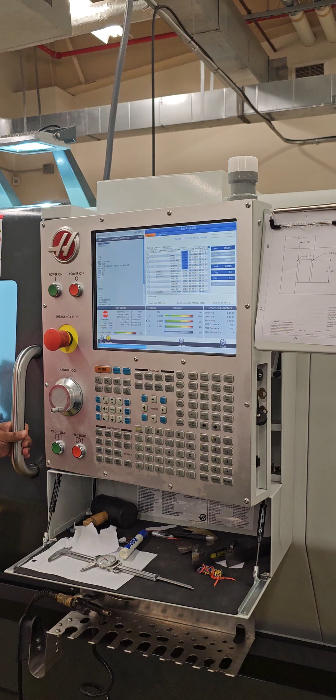For your lathe test, when you're gonna take a retest, it's gonna be damn near the same thing. You're gonna have a print, you gotta make your program, you gotta touch off your tools, right? So I don't care whichever way you do it. If you're studying the program and you say, man, I wanna knock out the program first, knock out the program. But don't get too caught up that you forget to touch off your tools, because what happens if you don't touch off your tools? You fail.

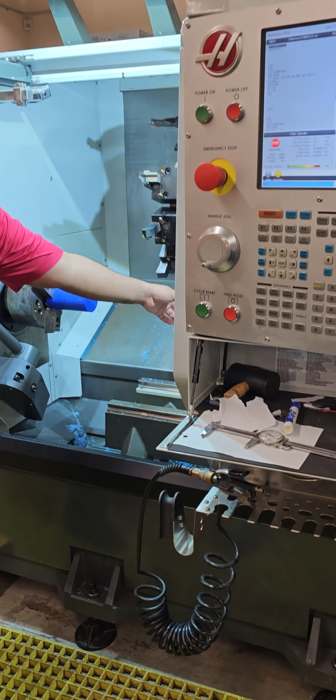Let's say I did a part before this and my part stuck out this long. Next thing you know, you do your program, but you fail to touch off your tools, and the next part that I'm doing is even longer. What's gonna happen? You're gonna break a tool. You're gonna crash, right? So your program could be flawless, perfect, but you still fail, all right?

So obviously, if I touch off, I'm just gonna come over on my Z face, come over to the part.

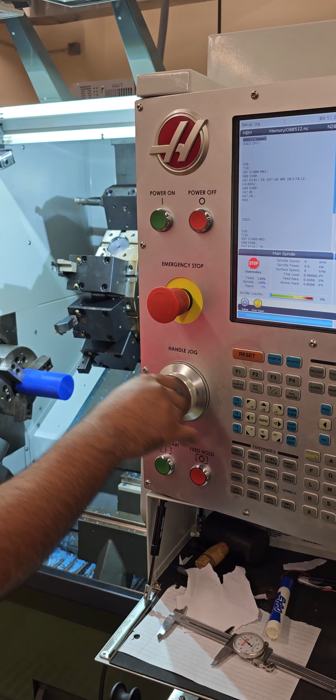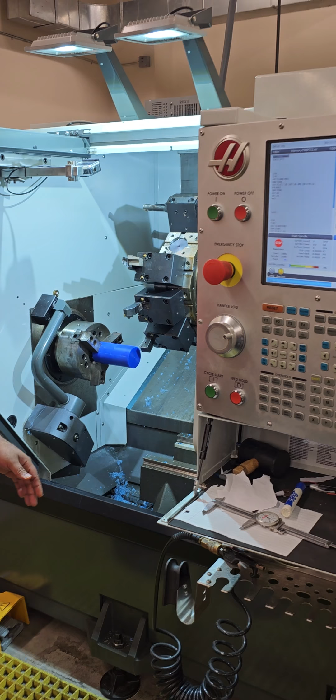Now, the first thing you probably want to do is make sure your work is on 0. G54Z. Remember, guys, how I explained to you that if I have a part here and I zero everything there, then I get a longer part. All I have to do is call my lead tool and change my Z under my G54, and everything else follows, correct?

So I want that at 0 to begin with, right? Okay, so if the last person had a number in there, make sure you go in there and you put it at 0. Does that make sense? Yes. So you want 0.

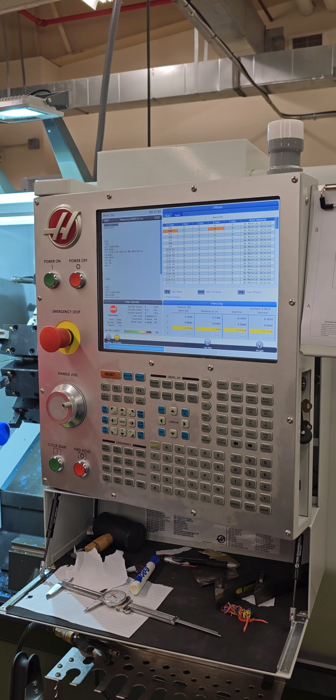Now you're gonna come over here and your tool number 1. You're gonna come over on your Z, get your piece of paper, what have you, come up to the front. If that's my 0, that's my 0, right? Same thing with the X. Come out, go up, come back over, bring it down. Once it gets tight enough that you can't move the paper anymore.

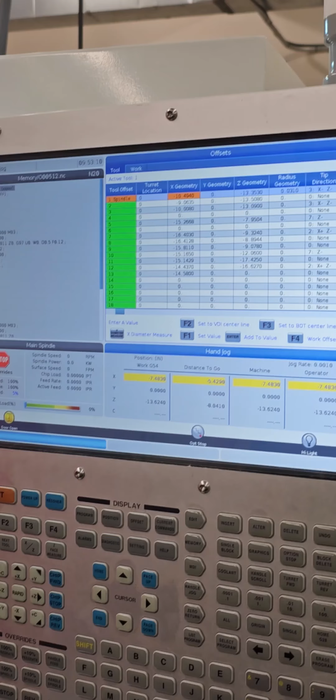All right, now like I said before, this computer is a smart computer. If I push X diameter measure, it's gonna jump to it right away. But when you get a job at a real shop, you don't know what type of machine you're running, you don't know how old the machine is, you don't know what brand it's gonna be. So get used to coming over to the X, because on the older ones, you push X diameter measure, if you're not highlighted on it, nothing happens.

So you wanna be on X, push X diameter measure, then we're gonna enter the diameter of the part, correct? So if it's 3 inches, we're just gonna enter there 3 inches. If it's 3 inches and 5 thousandths, measured with the calipers, we enter 3 inches and 5 thousandths. Hit enter. Boom. Change that number, right?

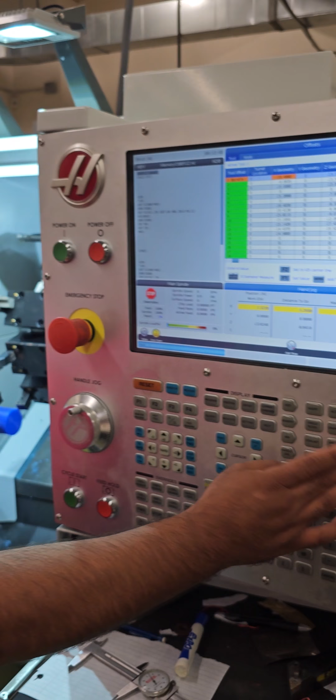Now after that, just raise up your Z, go a little bit faster, close the door, be at 5% if you're taking your test, and just push the home button. That's gonna send it home. I'll probably tell you, bump it up to 25 because I know it's going home, right? So you just bump it up to 25. Bam. If you want to, while you're still here, go back up because you know you're gonna run it 2 inches above in front anyways, right?

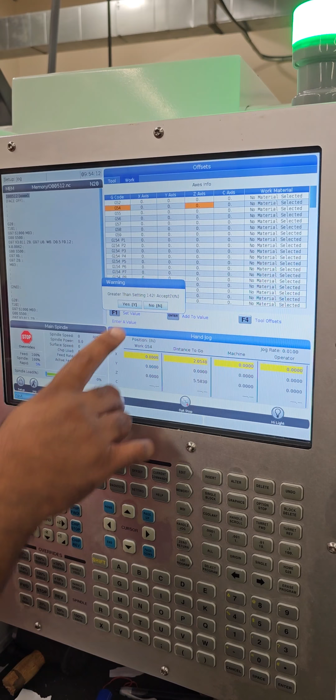Come over here and go ahead and put your 2.0, enter. Is that what you really want to do? Do you accept it? Yes. There goes my 2 inches, right? Now the Z that I set in front here, it's now 2 inches in front of the part, right?

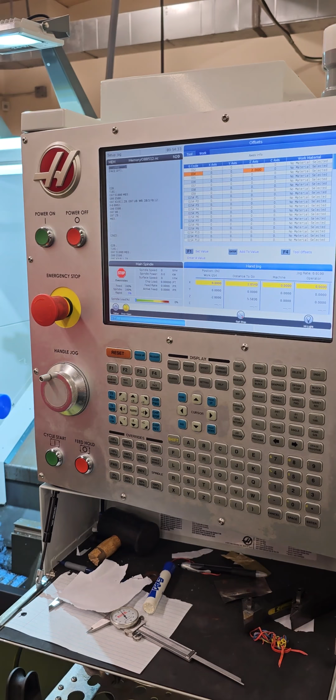So why do we do that? Because you guys are still training and we can't just pull out the programming graphics and start going to town on the part, right? We got to make sure that we're not going to crash or that the part's going to match the print, right? The program's going to match the print. So we have that on there, right?

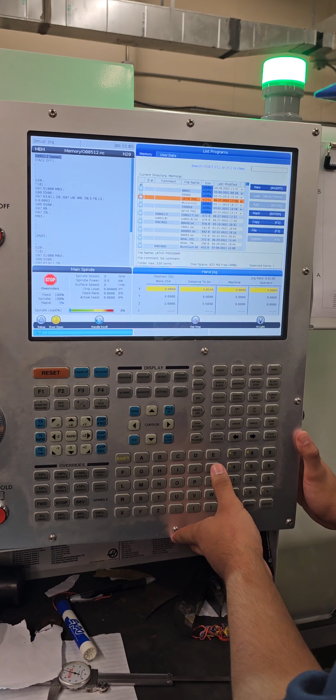So let's say we wanted to make 515, right? It's not in there. Just like I told you guys before, read your screen. If I wanted to make a new program, what does my screen say? New, click insert. So hit the insert key. I want to make 515, so 515.

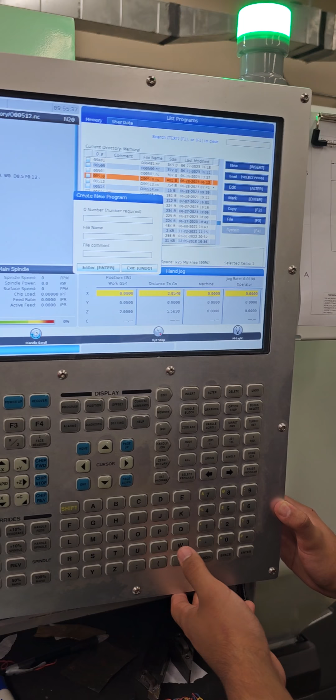Enter. What happens? It pops up, correct? It creates that program. Now we're not selected yet, correct? No. So now we're gonna use the down arrows to get on it.

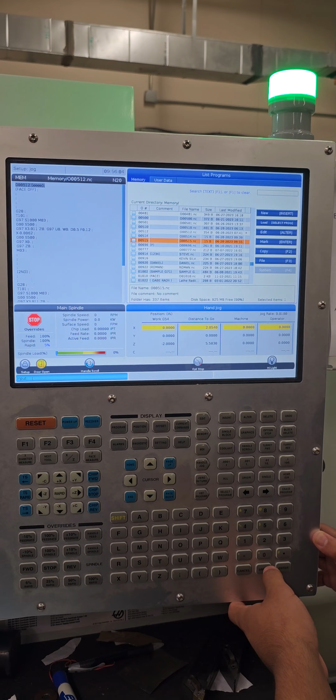This is the way I talk because I have to ask you guys questions. What are you trying to do? Oh, I'm trying to select that program. What are you trying to do? I'm trying to select the program. What are we trying to do? Oh, select program, correct? That's it. So push select program. There we go.

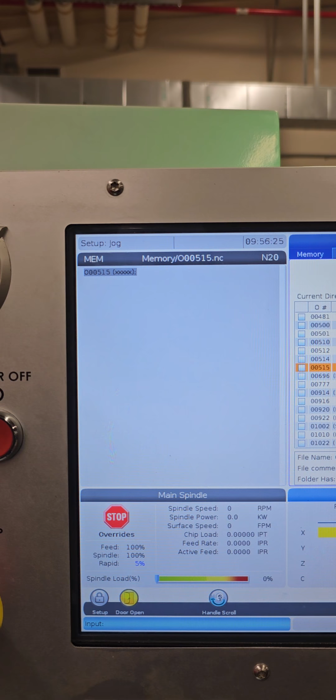Now it's on there. Now after that, we gotta edit the program to make the program, right? So what key are we gonna press? Edit. That's like the only thing I knew.

So now from here, we go ahead and step away. From here, we're gonna start writing our program, correct? A lot of you guys made mistakes. Some of you guys made simple mistakes, some of you guys made huge mistakes, right?

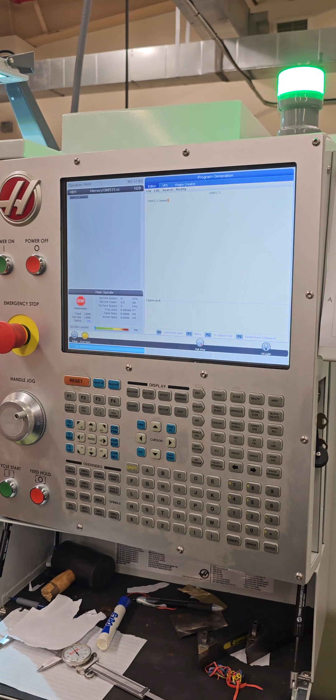So this program, what you wrote down in your notebooks, that's what you could study at home. I know you can't study this at home because who has one of these in their house? None of you guys, right? So of course you can't study that at home. But writing down the code and understanding the code, you guys could do that at home, correct? Yeah, the book has it, but good luck deciphering what the book's talking about when you read it. But the way I explained it to you guys and the way you guys wrote down your own notes, y'all should be able to understand it after that.

We went over canned cycle facing how long ago? A few days ago. First time we went over it, what, 3 or 4 weeks ago? Canned cycle, yeah the facing. Oh yeah, about 3 weeks ago. Yeah, 2 or 3 weeks ago. And we still made mistakes on it, guys.

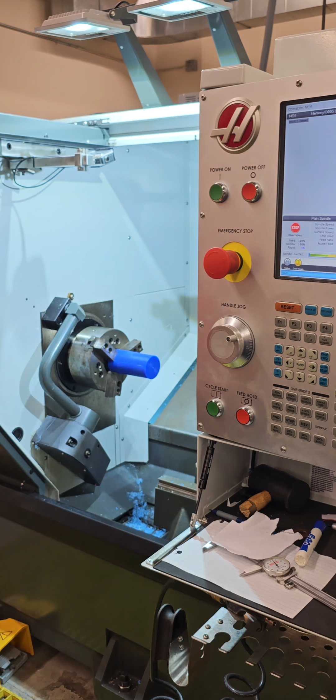Whatever I teach you guys, it's not like, okay that's what we learned, let's move on to the next thing. I didn't learn it 100%, but it's okay, I'm still gonna move forward. No, we have to understand it, because that's our bread and butter whenever we start working at a shop, right?

So the first thing I'm gonna do, I'm gonna put a little bit of blocks because I like my space in there, right? So this one doesn't have an EOB, but it has that, what the hell you call it, semicolon. Yeah, that one. That's why I don't teach English.

All right, so what's the first code I'm gonna put on top? G28, right? I want to send everything home. Be safe, correct? After that, very important, I need a what? Tool number, right? If I forget the tool number, what code is it gonna give me?

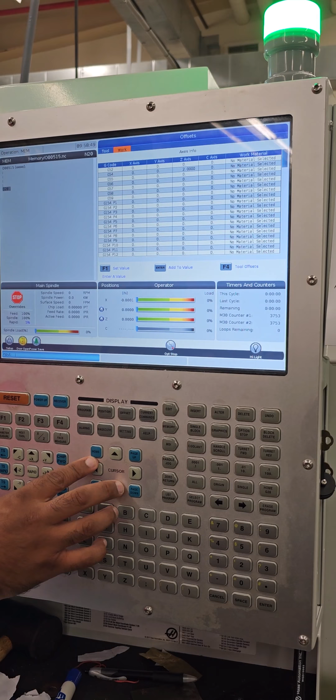X over travel or Z over travel, right? And you're gonna look at your numbers after that, correct? Why is my X going over travel? Why is my Z going over travel? It's because you didn't give it a tool to identify the geometry numbers on them. Does that make sense? Because you didn't give it these numbers at all.

So it's thinking the machine coordinates and it's thinking, hey, that's way too damn far. Because you didn't give me a tool number, that's why it says X over travel or Z over travel. Does that make sense? All right, we're going back to edit now.

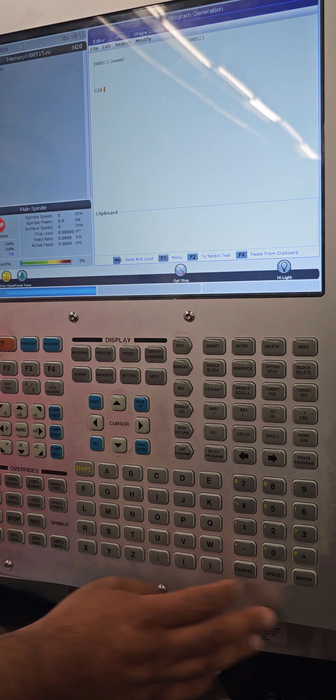So now I need my tool number, T101, and the block enter, right? Right under my tool number, I need to give it a what? A maximum for my RPMs, correct? So G50, S, let's just say 1000, right? And the block, correct? After that, I'm gonna turn on my spindle with the G97 first, correct?

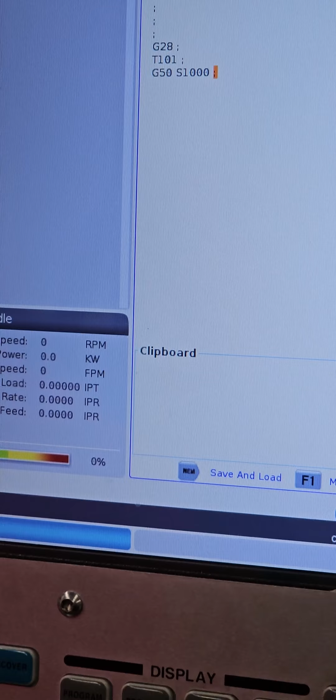So a G97, S, 500 is fine or 400 is fine, but we want to include our spindle direction in this one, so our spindle turns on, correct? M03, and the block, enter. Oh I put a G91, it's supposed to be a G97.

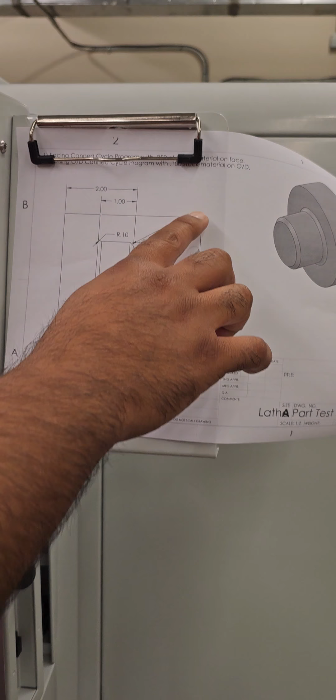All right, we're tracking so far? All right, so what's next after that? Starting position? Starting position, right? So I need to put a G00, G54, X, if I'm looking at my print, 3.1, Z, depending on how much stock I have in front, that's what I'm gonna put for that, right? But we're just gonna pretend it's just 100 thousandths right now, correct?

So, G00, G54, X 3.1, Z 0.1, and the block enter, correct?

So after that, we need to give it a G96, right? Because it's gonna go faster and go slower as it goes to the center of the spindle, correct? So we're gonna put a G96, S 400 is fine, also 450.

All right, we got that so far? How many of you guys messed up on your program before those numbers?

I messed up. I was showing up. For me, it's not that, oh, you're a teacher so you're supposed to know this. No, you know how many teachers still don't know this, even though they teach it? I don't have any notes right now guys, I'm doing this off the top of my head.

So this is how you get to be a lead man and a supervisor at a shop. This is how you do that. But like I said guys, it's just studying and studying, understanding what you need before it goes on there. We need to send it home. We need to give it a tool number. We need to give it a maximum RPM. We want to turn on the spindle if the part falls out.

We need to give it a starting position, and then we give it a G96. That's my intro guys, right? I've been preaching that since the beginning. That's your intro. Make sure you got the right tool too. So what's next? Your body.

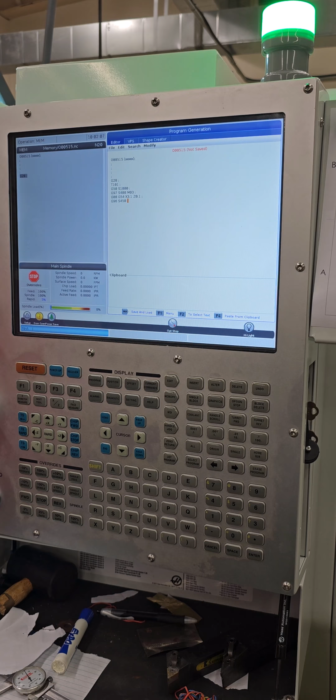G what? Which one puts it on the x-axis? 0-1. What? G72. Yes, G72, it's your canned cycle. G72, all right. So I need a G72.

And then I'm gonna need a P after that, because that P is gonna start with the first number line. P10 is fine. So P10, then I need a Q, Q20. Then I need a U. U is a stock material for my finish pass, but we're just gonna leave it as a 0 right now. So U 0.0, W 0.0.

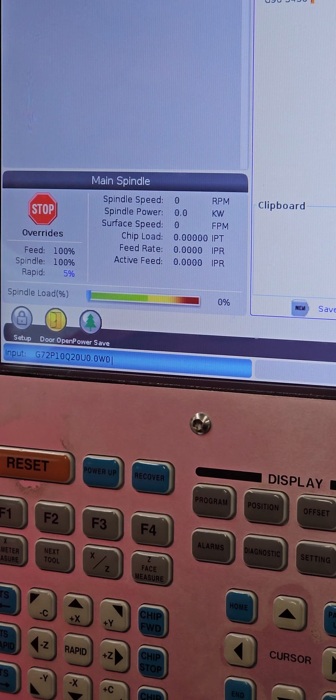As I'm putting this on, I also gotta tell it what depth of cut I'm gonna take. So I need a D value. I could just put D.1 or D.05 if I'm gonna take off 50, then another 50. And I can't stop there, I still need to include the last thing, feed rate. I need to tell it how fast to go. F.012 and end the block. Boom.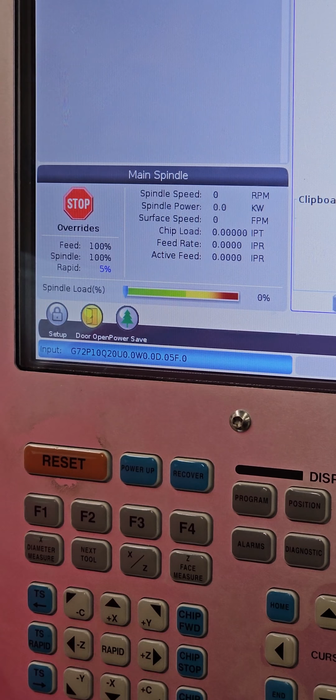How many of you guys messed up on that line? Well, one good job out of you guys, right?

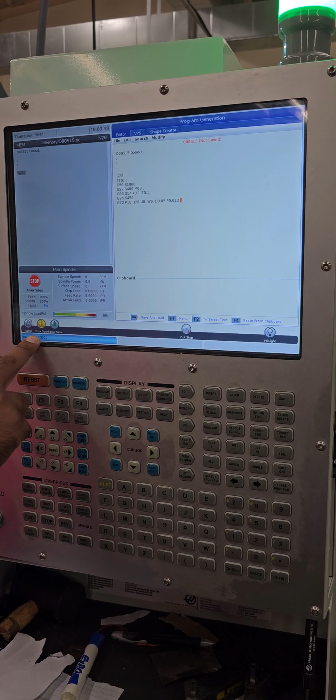So right under my G72, obviously I have P10. So the first thing I need is an N10. So we're just identifying what we're gonna cut and where we have to be at. Just the geometry. So I'm gonna put a G00, so it rapids up on my Z to that location. G00, and I'm just gonna put Z0, because I'm facing and I want to end up on Z0 when I'm done. I'm starting at Z.1 and I'm gonna end up at Z0. Does that make sense? Yeah.

So I identified over here on my Z, but now I have to put the cut going down, correct? So now we need an X. So that's gonna be a G01 now, right? Linear cut. We gotta change it to a G01, X negative 0.062, correct? X negatives are going down, so we gotta subtract material to pass the face of the center line, so you can cut off that nipple. And that's double the tool nose radius, the tool compensation.

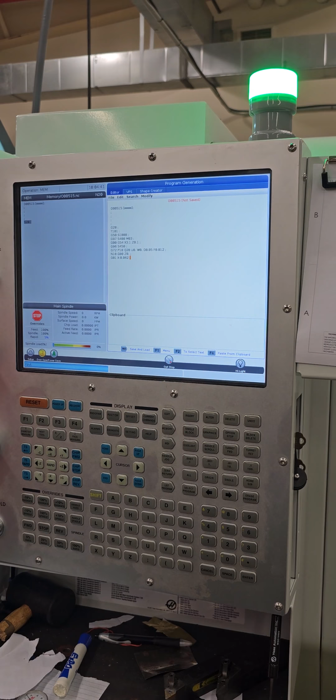So what's next after this? You have to rapid off. I have to come off the face, correct? So I'm gonna change it to a G00, Z.1 end the block. Oh wait, I need my N. So N20. There we go.

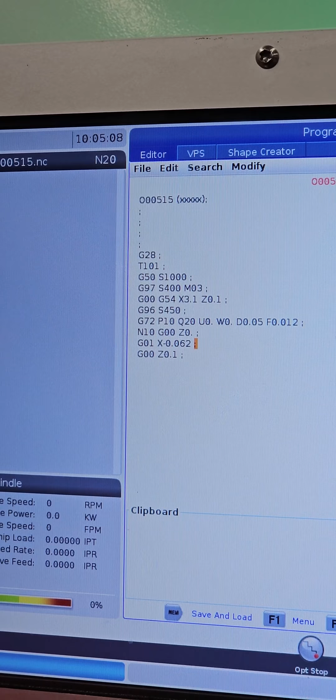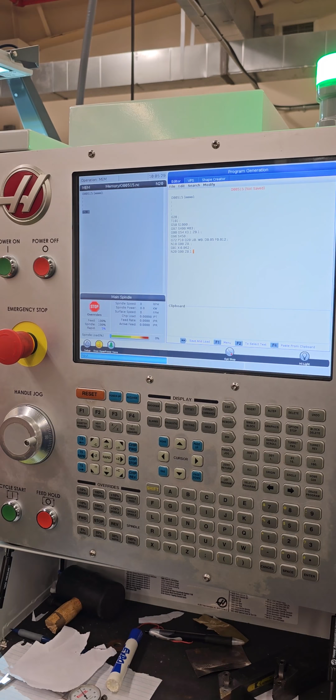So after this, it's my choice however I want to come off of it. I could G00, G53, X0, G00, G53, Z0, or I could just G28 it. G28, because 9 times out of 10, if I'm facing, I don't have a tailstock on there, because how the hell are you going to face with the tailstock on there? You won't be able to. So G28, end the block, enter.

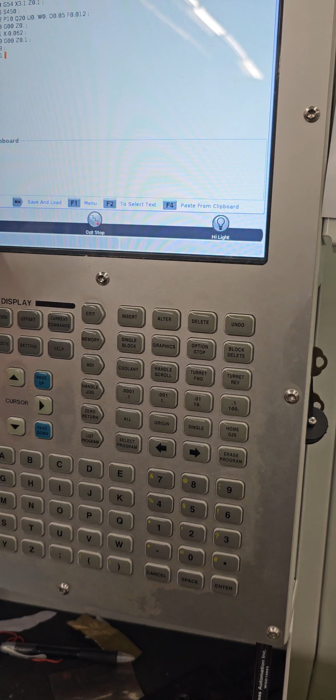Now I'm going to put an M01 at the end of that program. Now, like I said earlier guys, now that we know a little bit more about this machine, if I have optional stop on, it'll stop at that M01. If I don't want it to stop there, I just take it off and the program will continue running all the way through. Does that make sense? That's what M01 does with the optional stop. If I put an M00 there, as soon as it reaches the M00, it's gonna stop, and it's not gonna go again until I push the green button. Does that make sense?

If there's an M30 there, I'm just looping that same program over and over again, never getting to what's under there. Does that make sense? Right now there's nothing here, but if there's more program under that, it'll stop and go with the optional stop. We'll do that.

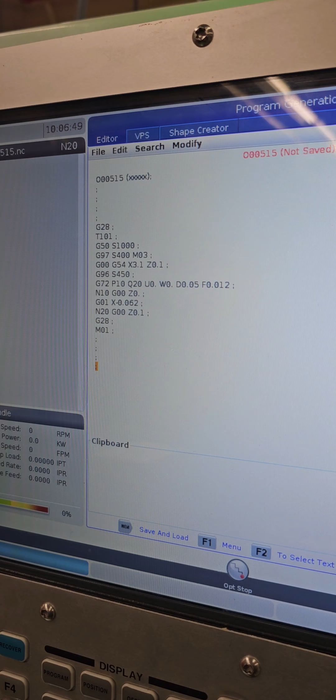So that's my facing, right? Now I have to do my turning OD, correct? Of course, you want to start it with the G28 again, just to make sure it's safe. We still want our tool number, T101, end the block, enter.

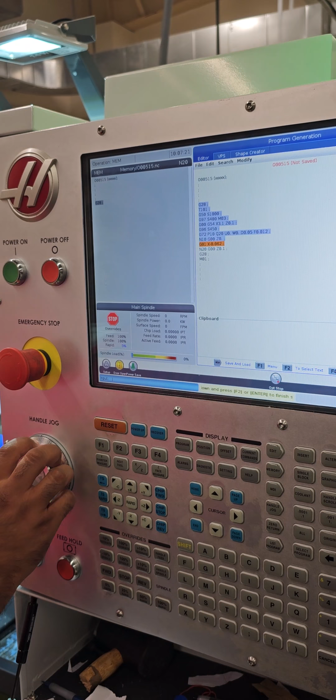So really, I could have copied and pasted pretty much this whole thing up here. Let me go ahead and do that so it's easier, but you understand what you're gonna move. If I hit F2, come down, highlight it, hit enter, where I want to copy to, right there. Hit undo, well that just takes it off, right?

So whenever you copy and paste, make sure you go through that new program and understand what you're doing for your next operation, so you know what to erase. Does that make sense? Because if you don't take some of this stuff off, especially on the mill, you're gonna have problems because your H's and your D's aren't gonna match your tool numbers.

Does that make sense? So we know we have a G28, we gotta send it home. We're still gonna use tool number 1, so we'll leave that alone. Our maximum RPM, that's fine, that's fine, that's fine, because we're still identifying the stock, so that's fine. We still got a G96 on there.

Now a G72 - if I leave that G72 on there, it's gonna throw me an alarm. Does that make sense? So now I have to switch that to a what? G71.

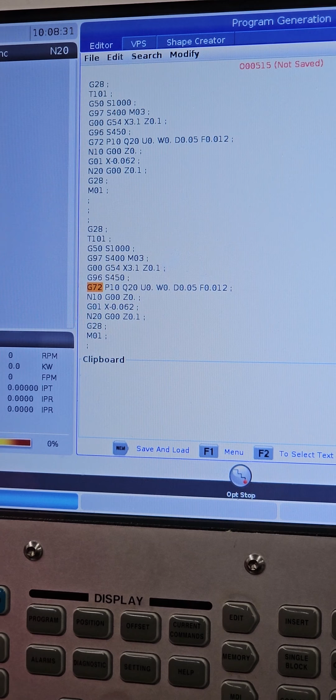So if I leave that P as it is, what's gonna happen? Get an alarm, right? Because it's matching my face piece. So it's gonna give me an alarm, right? So I gotta change that. Put it P100 if you want, Q200.

But make sure you come over here and change the N's also. And 100. Is that good?

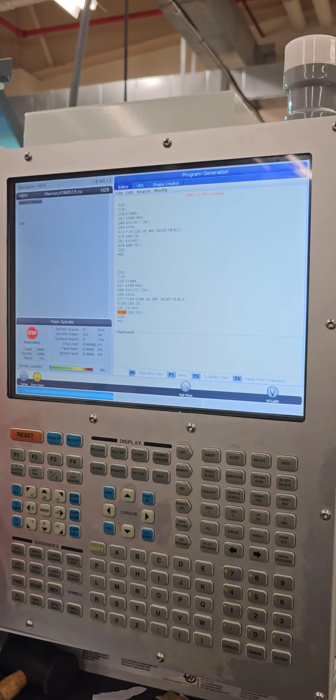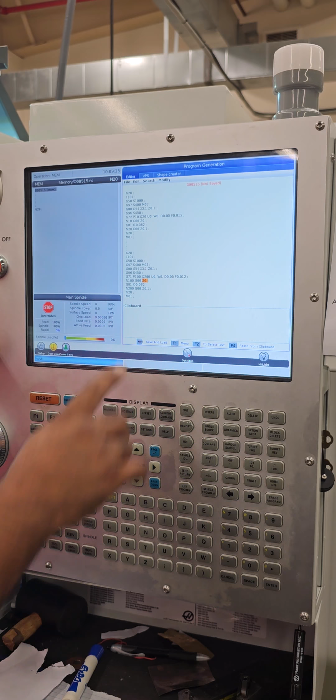So now we have our program coming in here. We could rapid at G00, but we're gonna have an X here, because we're still 100 thousandths in front of the part. So our X values - what did we say earlier in class? That we're gonna take our 1.5, 100 thousandths from the top, 100 from the bottom, and then go 100 thousandths lower from it, to start our actual chamfer move. So that X is gonna be 1.5 minus 2, that equals 1.3 minus another 1, 1.2, correct?

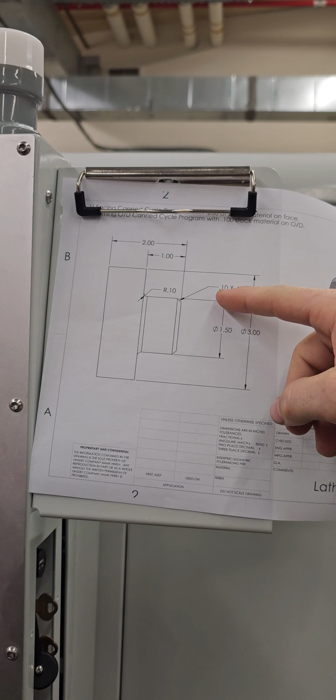Wait, I thought you were doing 1.5 minus 0.1.1. And then we're taking it down another 100, because if I start my chamfer right there, it's gonna fold over, remember? So we're just gonna start 100 thousandths under that, under the chamfer. Gotcha, that's all we're doing. So that's 1.2.

Are we tracking so far? Yep. Alright, I could go ahead and delete this because I know I'm not going to use it. I'm not facing anymore, right?

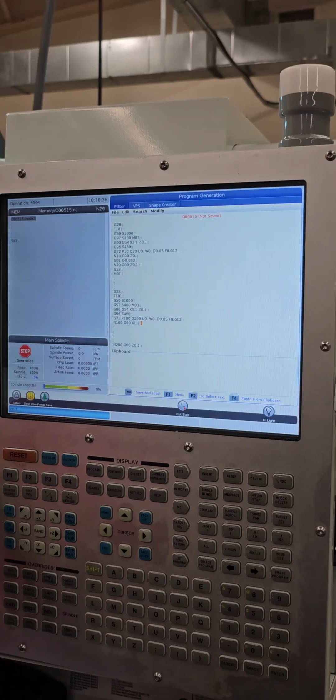So now that I'm on that point, what do I have to do if I'm going to activate cutter comp? Gotta put in my G02, right? So we're going to put in a G42. You said 0, you meant 42. G42, that was my accent. Put a G42 on there, right?

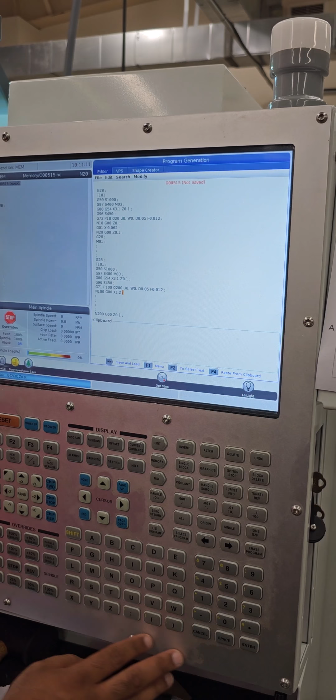Put a G01 because I'm coming to the face of the part, straight line, and Z0, correct? So G01, Z0.0 in the block. Does that make sense?

Now the program, the one in the book probably has your G42 up here. It's gonna do the same thing, as long as you activate it before you're on the part. Does that make sense? Remember the rule when we were reading cutter comp - it needs to be activated off the part going onto the part.

Okay, so you're basically starting here, about to go in on Z0 right now, so I can start doing that radius. But then you're at X 1.2. Yeah, so that's 1.5, 100 from the top, 100 from the bottom, that's 1.3 minus another 100.

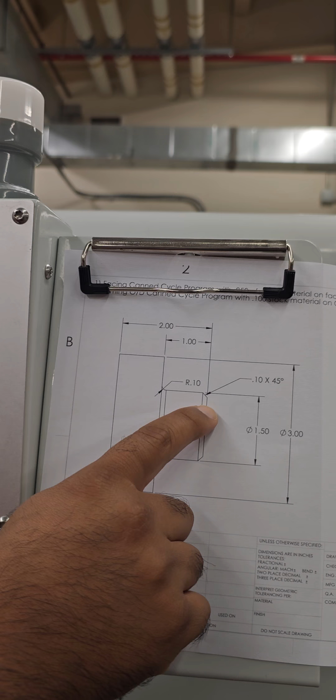So I'm right there right now. So you're basically right here. Yeah, you're going in, then up, then over. Got it.

Alright, so now my next movement is gonna be - I'm still in a G01, correct? Yes. So my next movement, my next point is gonna be right here, 1.5 minus 0.1 minus 0.1, X 1.3, correct?

And this is where we get confused. Okay, got it. So now I'm making this point at the end of the chamfer, correct?

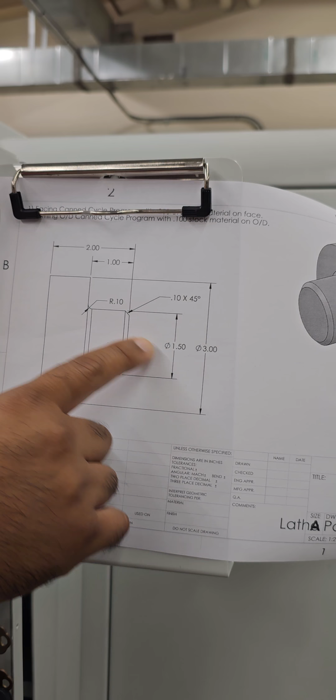So that X is going to 1.5, it's telling me right there. It's ending up there, so X is 1.5. My Z is negative 100 thousandths, because it's telling me right there. Just subtract, correct? So X 1.5, Z minus 0.1. And the block, enter. Too easy, right?

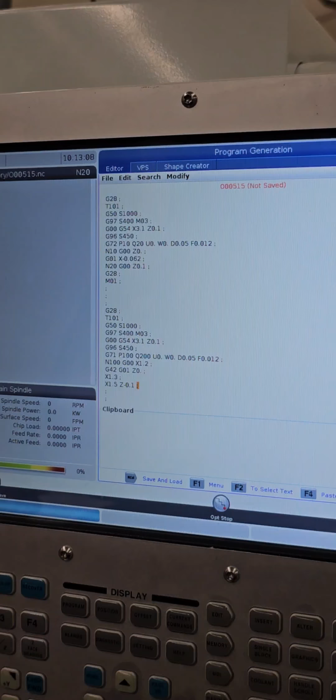It's too easy now, but what happened a few hours ago for all of y'all? Brain fart. Well, I told you guys. Oh, class ended already. No, screw it, we like this. We need this. Let's just call it. You're ready for your test next week, guys. Get back over here.

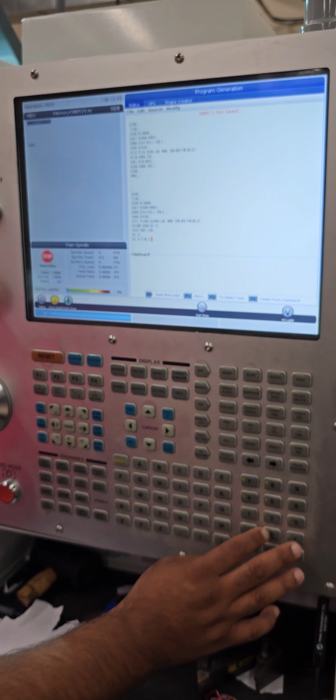All right, so now we're still under a G01, correct? Yeah, so that needs to come to this point at this radius, right? So if that's 1 inch, and if that radius is 100 thousandths, Z minus 0.9, correct? So it's 1 inch minus 0.1, which equals 0.9. Yeah, but it's in the Z negative direction. Right.

What we did there is took this minus this, which now puts there. We need to change it from a G01 to a what? G02, because we're going from 6 o'clock to 9 o'clock, right?

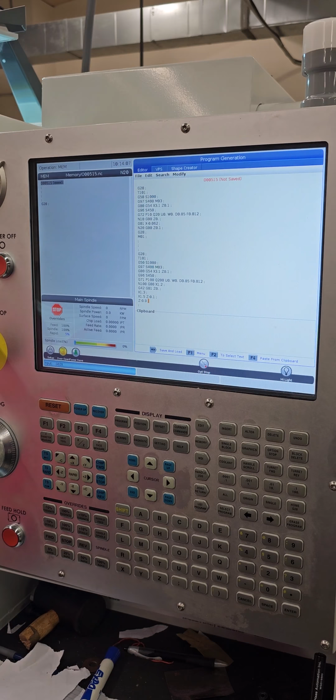Yes, so for a G02, my X value is going to be 100 thousandths plus 100 thousandths. 1.5 plus 0.1 plus 0.1, so X equals 1.7. Yeah, so this plus this again for the bottom, 1.7. And then my Z, well it's telling me right there I'm going to end at 1 inch, correct? So 1 inch, so Z minus 1 inch.

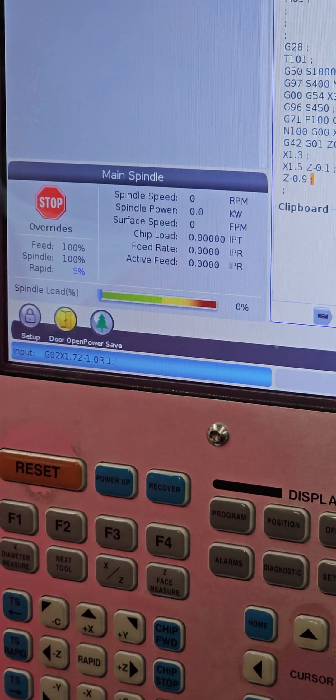From the face. Now I can't forget my R, guys. My R is my radius, correct? Radius, so R is 0.1. And the block, enter. So G02 just finished up right there after.

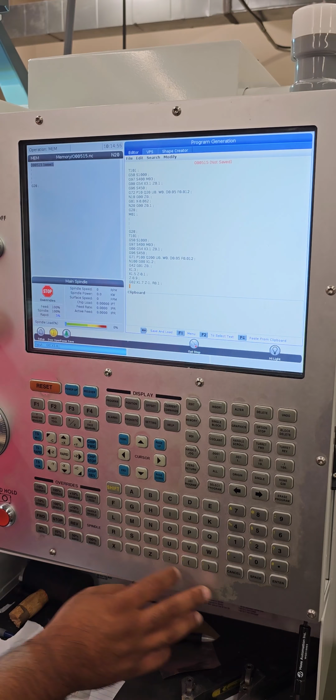Okay, now all I'm gonna do is G01 up, to 3 inches, correct? So G01, X 3 inches. And the block, enter. That's good.

So you're just going to that top part, right? Yeah, just right there, we're about to go over. Could you go up like 100 thou above that? I mean, you can, but I'm gonna turn off my cutter comp coming off of it. That's why I just stopped there, because those are the numbers there.

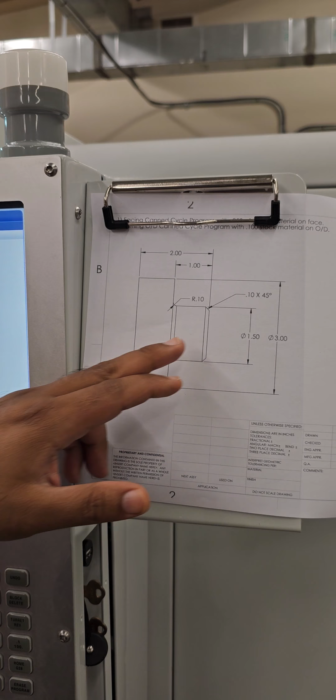Now I got choices I can make, guys. I could go Z minus another 1 inch and then come off of it, and that's fine too, right? But we just want to describe this part. Really, the exercise of this is you guys learning the canned cycles, knowing how to do chamfers, and knowing how to do radiuses, right? That's the whole purpose of this exercise.

Right? So now I have to end this with what? What's the next line? Gotta go off. But what else, though, guys? I'm coming off the part now. So what do I need? What do I need? This is 0. Coming off the part now, I already identified my geometry.

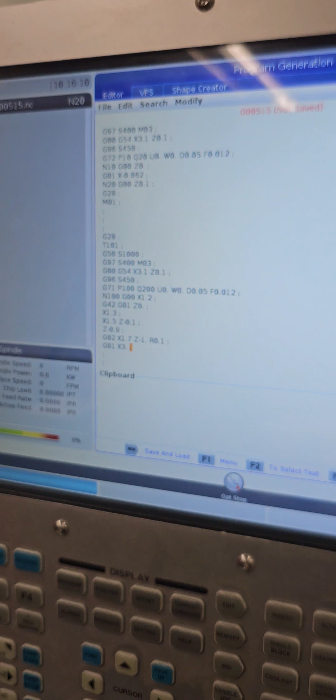What do I need? To go home. Rapid, go home. Let's go home. I need another line, right? Oh, I have my N200. N200. Oh, N200, yeah. See that? N200. Oh, I tell you. N200, right? Because I finished my geometry of my part.

Now I'm going off of it, correct? Yeah, so I could do N200, G00, G... what's the G40? Cancel, cancel cutter comp, right? And my X, I'm just gonna go up.

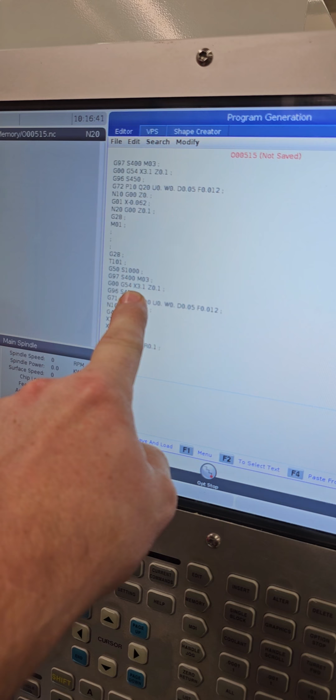3.1 is fine, right? But also, I saw in a video this X 3.1 is supposed to match up here, the same 3.1. It can be, or it could be bigger. It just means to be at least that, or higher. Okay, end of block, enter, right?

Then after that, I just need a G28, end of block, enter. Now you can go home. M30, end of block, enter. That ends the cycle. So how many lines of code is that?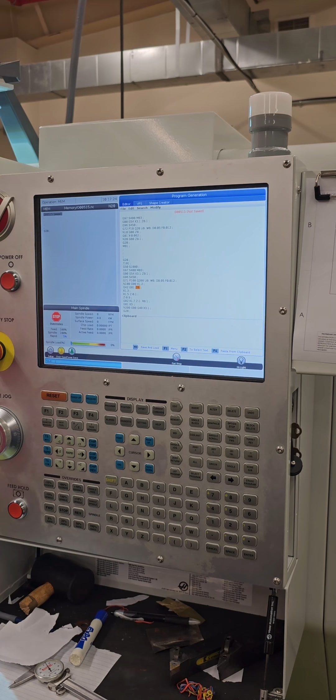About 28 total, between all of them. Compared to if I had y'all do this line by line, how much more code would it be? And then if we didn't use cutter comp, even more complicated, correct? So let's see how this fares on the graphics.

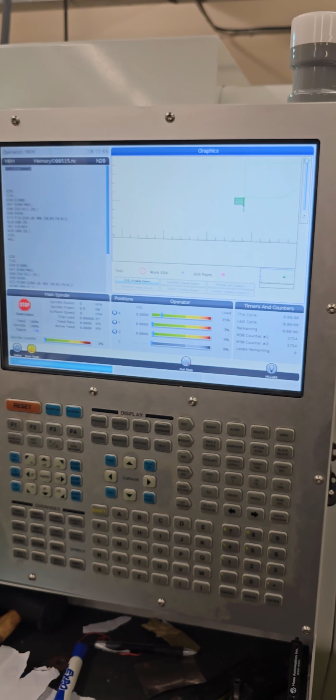How many alarms did I get, guys? None. It's because I gave you all the answers. I ran it in graphics, right? I'm already 2 inches in front.

Now we'll close the door and actually run it 2 inches in front of the part. Then my test will be over. Let's do it. You're still timed on the machine, yeah, from the beginning until you run it 2 inches in front of the part.

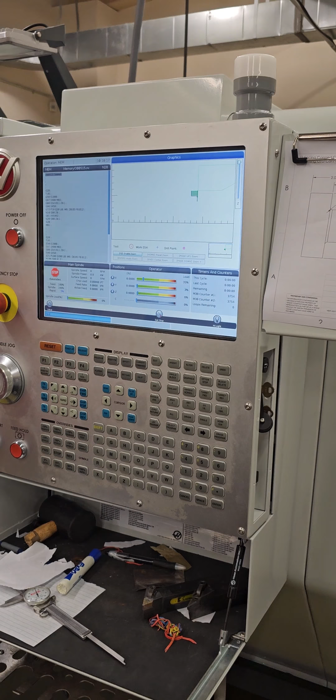Because graphics is just going to tell you have an alarm. But the actual cut of the radiuses and the chamfers and everything like that, graphics doesn't tell you whether you're right or wrong. You can finish that part, take it to inspection, and they're like, hey man, your radius is too big, or your radius is too small. Is it going to tell you on the graphics? No. You got to measure that out, and you got to look at your code, and that's what actually makes your part. Does that make sense? Mm-hmm. That's why we do it that way.

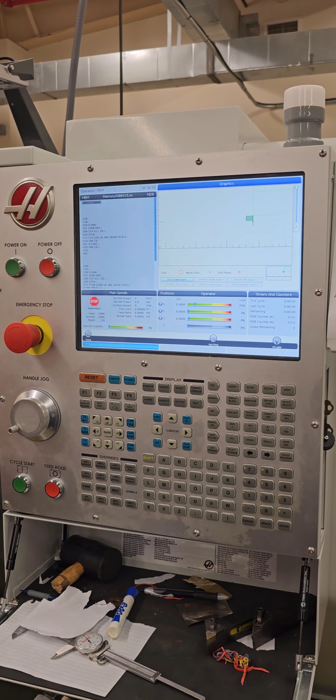Before, we used to have them run it 2 inches in front of the part, and as soon as we wanted to take a part home, now that's included in your test too. Do the touch off, do the program, run it in graphics, run it 2 inches in front, then run it on the part, and you can take that part home. All in 20 minutes. Go ahead.

Let's run it. I know it's gonna run. Oh, let's see it. Who wants to see it? Who wants to see it or who wants to go in the mill and learn the mill too? Raise your hand. Because after that, it's gonna be 12:30, and you guys gotta go to Gabriel's class. We'll be late to his, but okay.

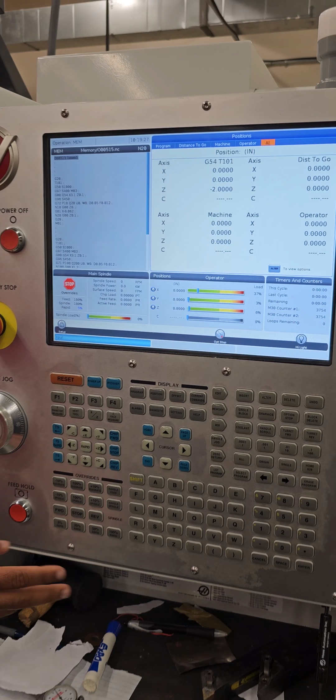It's gonna run, right? Mine's gonna take 3 minutes. You're gonna run under memory. Make sure you're in a position when you're running. You guys are gonna be on a single block, right? So I'm 2 inches in front of the part. There it is running. My depth of cut is 50 thousandths. I was at 0.1, so that's 50. It's gonna come back forward, go up. Now I'm at Z0. Most likely it's gonna take another pass on the Z0, right?

So there goes that. Like I said, just one more. And after this, you should go home.

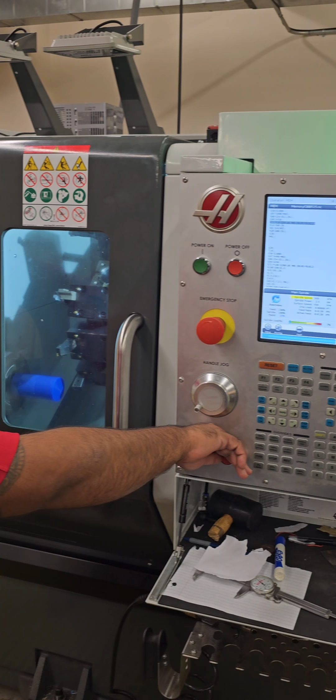All right, on to the next one. So, see how we have our optional stop on. That's why it stopped after that, is I have an M01 and optional stop on. If I didn't have optional stop on, it would have ran through it. Alright?

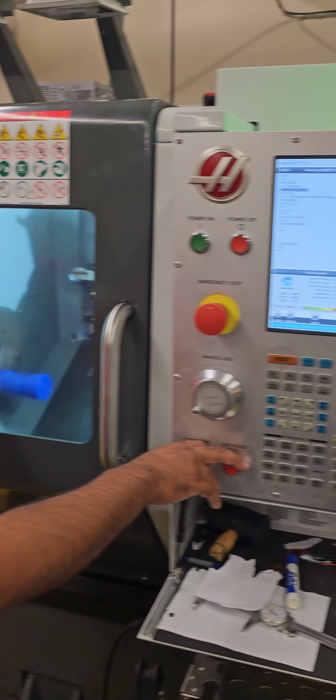So now push the button again. Here we go. Still 2 inches in front of the part.

I should have increased my depth of cut because I just left it at 0.05. For your test, if you want to put at D0.1, 100 thousandths, go ahead. That way, it's going to be a hell of a lot faster, because you're going to have a lot less passes. Does that make sense?

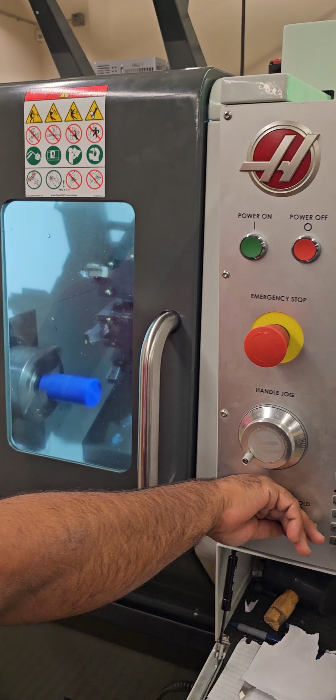So the depth of cut is actually cutting this part out right now. It's going to take a while to get to there. Run 100%, it's at 50. So that's 2.6, and it's going to go down to 1.5.

So we got to get to here. But if you look, I put D50 on there, right? But it's actually taking out 50 from the top and 50 from the bottom. So it's going down 100 thousandths per pass in real life. Does that make sense? Yeah, because it's spinning the other side.

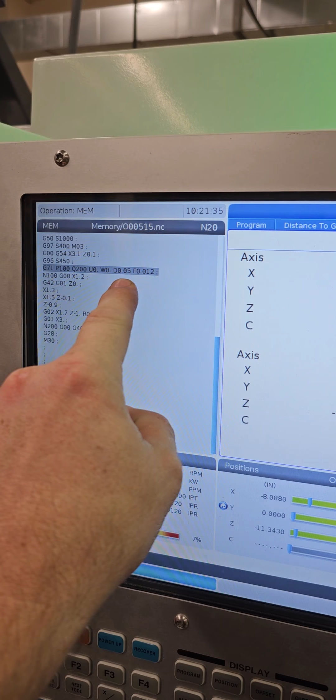Right here, it says X2.4. Watch, it's gonna say X2.3. So if you were to put D.1, 100 thousandths, it takes 200 thousandths per pass. So you gotta be careful with that, especially with inconel and cheap inserts, because it'll tear them up, right? Especially when you're working with the ID. That's another thing too.

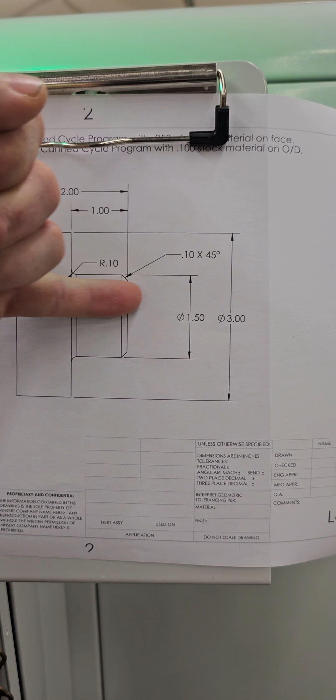So right now it's at 100, and it's simulating cutting from this 3 down to this 150. So it's simulating cutting this area right there. 1.9. Go 1.8, 1.7, 1.6, and then 1.5, and done with that part.

Get 1,000. It's already 12:20. You're gonna be late for class. Alright, that's fine, we'll go over there at 1. We're in no hurry to go there.

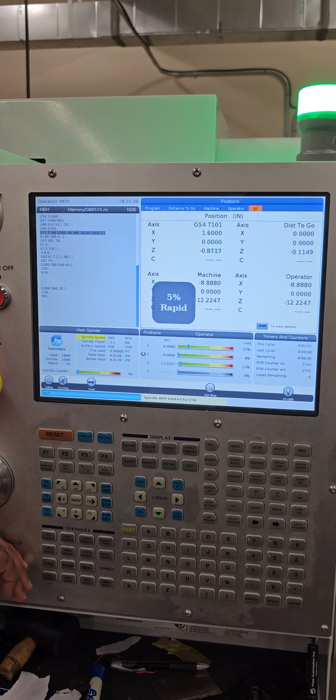Alright, so we're down to 5%. It's your favorite class, man. What are you talking about?

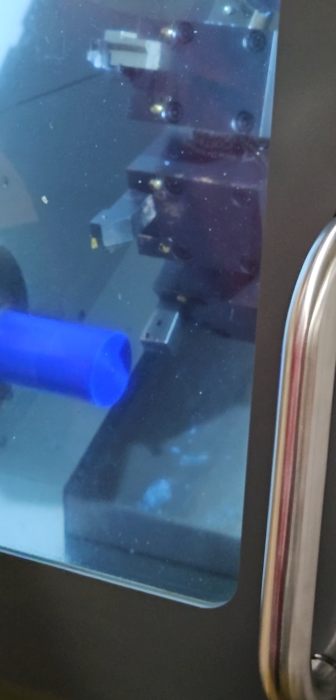Alright, so now it's gonna do the little chamfer. That's why you see these numbers coming up and your Z decreasing, right? Then it's probably gonna go to the start position and do the whole angle again. So I came up to the start. And that's a part. Oh no, it's going back home. Good. So numbers change like that.

Too easy? Too hard. That's it, guys. Now let's run it for real. Cut the part. What the hell is the point? Let's go over there so you guys can learn that.